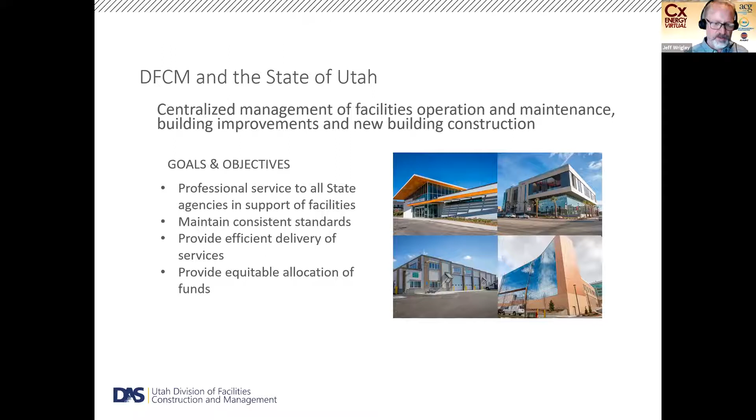We're centralized, and we believe this brings a lot of value to the state, mostly through the consistency of our standards and how they're applied. And then we also feel like we're pretty cost effective and efficient in how we deliver those services. So as I mentioned, there's two main groups within DFCM. There's the facilities management side and the construction management side. And then I'm part of the DFCM performance management group. And we kind of fit right in between and serve both sides.

And the goal of our program, as well as the goal of DFCM in general, is really to save taxpayer dollars. But we save taxpayer dollars through making buildings more efficient, making them perform at a high level, and there's other things too. Energy is important, but we also look at maintenance cost. We also focus on space utilization and employee productivity through well-being and comfort.

We work with facility managers to help improve existing buildings. We collect data. We try to analyze systems and find ways to improve them. We work with our capital improvement project managers through finding ways to optimize renovations and capital improvements. And anytime there's mechanical systems or electrical systems, we try to get involved, help bring in consultants and experts to make those better. And then we support our capital development project managers by the same thing, really. We bring in consultants and try to improve and make the most efficient buildings we can.

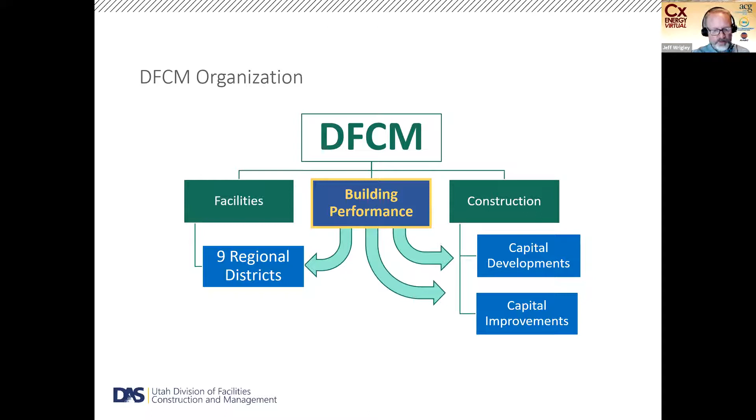We all work on projects of our own. We have many mechanical upgrades, lighting upgrades, different things we do that have an energy or performance focus we manage. But then we also all have focuses of our own. Kat focuses on space utilization. Sean focuses on data collection. And I focus on new construction and capital development. And a big part of our capital development work is our high performance building standard. And so this is really key to understanding our approach to envelope commissioning, which of course this is about today.

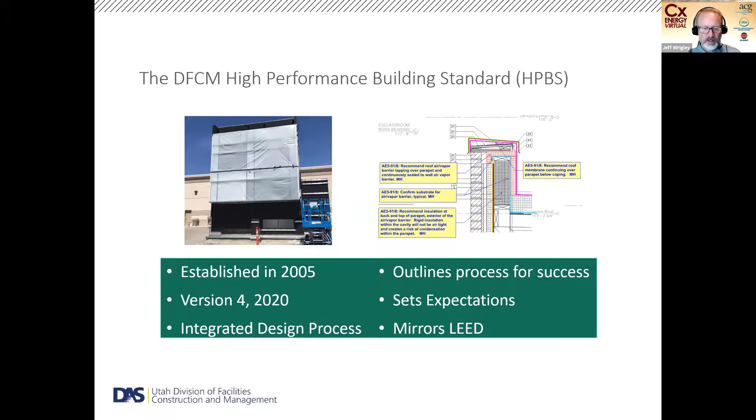The goal of the HPBS really is to spend money wisely during design and construction. We like to talk about sustainability. We all really want things to be as sustainable as possible. But when we talk to a lot of legislators and different people within the state and agencies, we find that cost is the driver. And so we focus on cost. We want to reduce the overall cost of ownership over the life cycle. And life cycle cost is an important key to the high performance building standard.

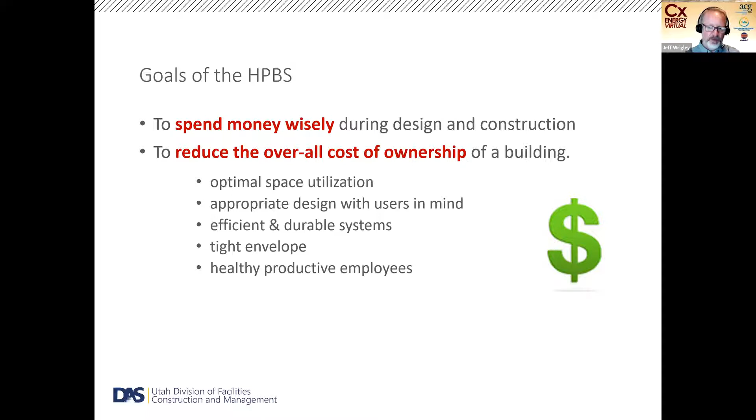But we aim for performance in a variety of ways. We're looking for optimal space utilization. We want durable systems, durable materials, things that will last. We really want a tight envelope. That's something that's evolved over time in importance, and we realize it. And in the end, we really want buildings that support healthy, productive employees. And all of these things help drive costs down for the state.

Some of the notable elements of the high performance process is we look for workshops at each stage of design. We try to bring everybody together. We want facilities management involvement. The people who are going to live in and operate the buildings are critical to the success of a project. And we have our consultants.

The high performance building standard outlines three primary consultants: the energy modeler, the systems commissioning agent, and the building envelope or building enclosure commissioning agent. We look for project long involvement from these consultants, and everybody is a resource to the project.

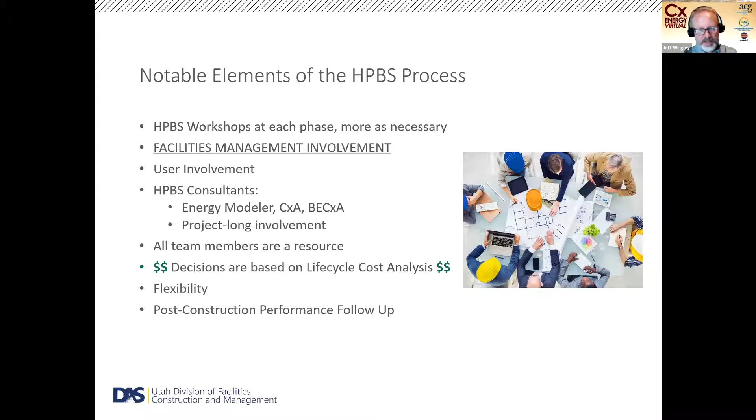The consultants are really the hub of that. We in the building performance program are not engineers. I think we're more project management and program management specialists, and we want to see this process go through very smoothly and with a high degree of success. That really comes down to those consultants we bring on board and relying on the expertise they bring. A lot of the program development we've seen over the years has come as a result of fantastic input from our consultant teams. We have great relationships with them and really value their input.

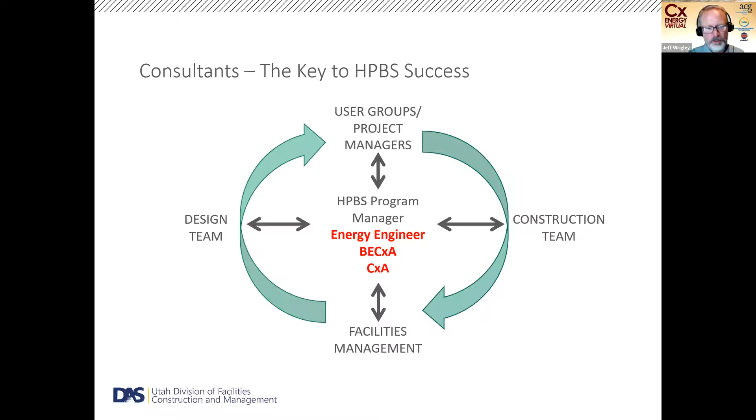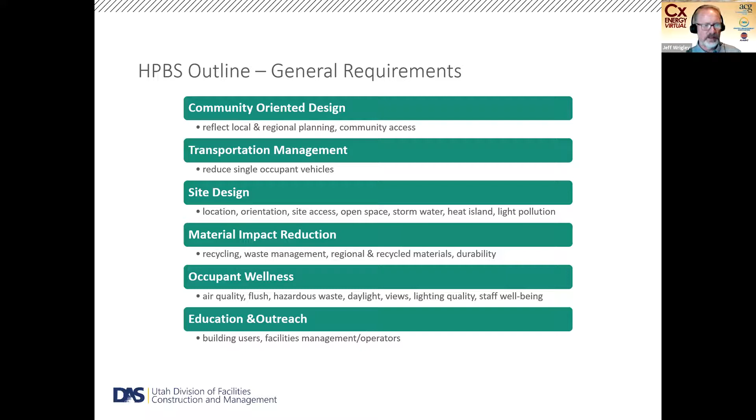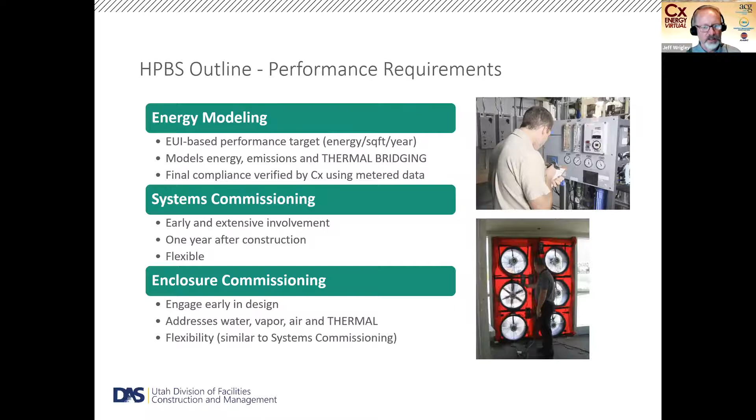So getting into this, I'll just quickly go through it to give context, but the various sections of the high performance building standard are again very LEED-like. We have specific sections addressing community-oriented design, transportation management, site design, material impact reduction, occupant wellness, and education and outreach. We have pretty detailed sections covering what we expect out of energy modeling, systems commissioning, and enclosure commissioning. We also address water use, metering, fault detection, and equipment purchasing.

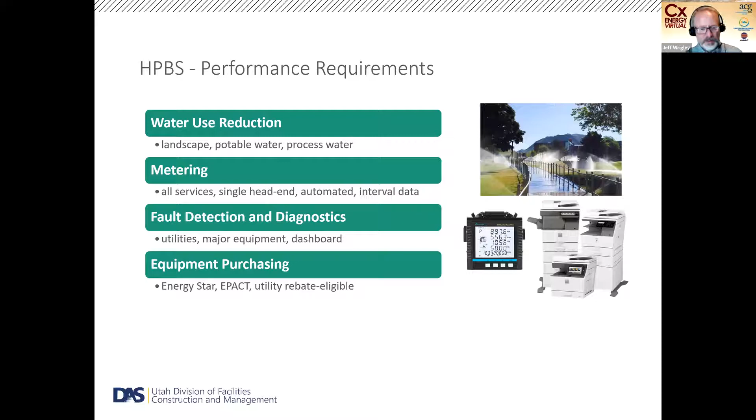So moving on, I'll talk a little bit about the development of the high performance building standard. It started back around 2005, ish. I was not at DFCM at the time, and I've talked to a lot of people, and this is the stuff that I've learned. But back originally, when we first got started, the standard was supported and backed by legislation and a desire to

promote those energy cost savings and efficient facilities. And obviously, or most likely, I would say this was all influenced by LEED and things that were going on in the design community at the time.

But looking back at the original high performance building standard, it was actually called the high performance building rating system. It really didn't say a whole lot. It was fairly brief. There was a lot of flexibility in it, probably too flexible, a lot of 'may' and 'might' and 'should' sort of language. And at that time, commissioning was included, but it was very limited in its role.

And so over time, we looked to update the standard, and a lot of pressures contributed to that. Really, there was a lot of interest within the state coming from the top. The governor at the time was very interested in energy efficiency and cost savings, and there was a lot of push for higher than code standards.

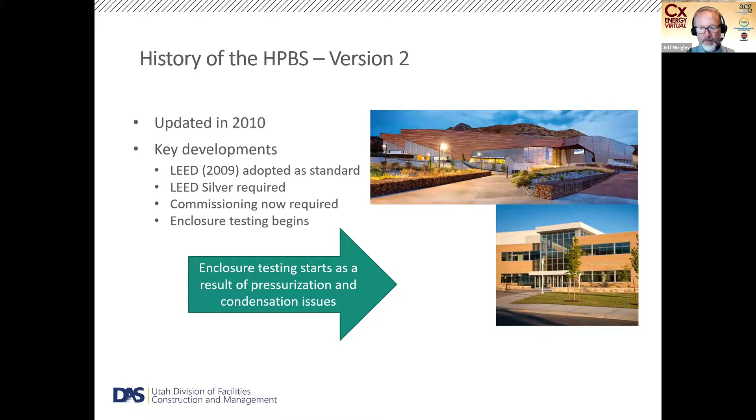So a lot of this led to the next update of the HPBS, which happened around 2010. As the consultants got involved and we started pursuing and looking at envelope in particular and commissioning, a lot of study went into it. There was a lot of interest even from our energy modelers. We had some really good eager energy modelers who were really willing to help look at the costs of improving envelopes and how all the costs came together. Our project managers were open to applying stricter air leakage standards.

The person who was in my role at the time explained it to me, basically saying for a couple of years they really played around with it a lot. They brought in a lot of different consultants. They really focused on learning as much as they could about, in particular, envelopes and what could be done. There was some pushback, but over those couple of years, they really dialed things in, and that led to the next version of the high performance building standard, which dropped LEED. We felt like LEED was evolved enough and understood enough, and we kept seeing a lot of the same things pop up. So LEED was dropped, and then enclosure commissioning became a big part of it, with a really strict performance goal of 0.1 CFM per square foot of surface area.

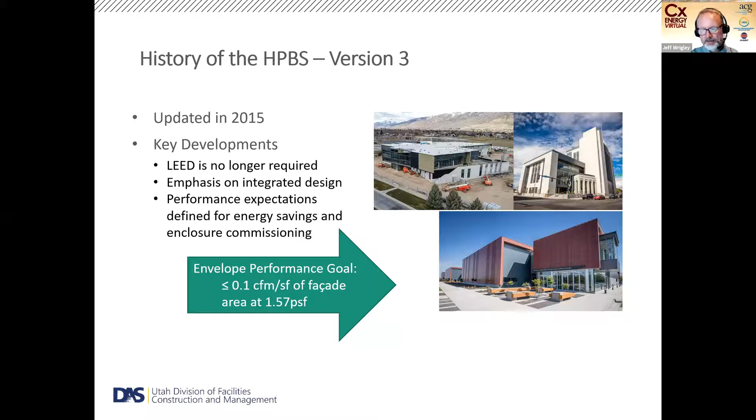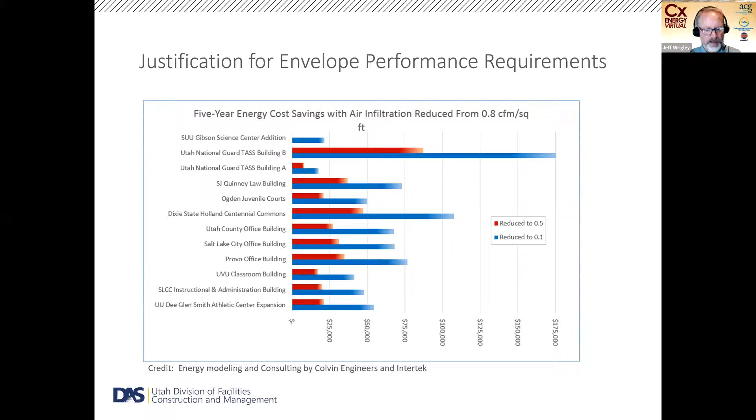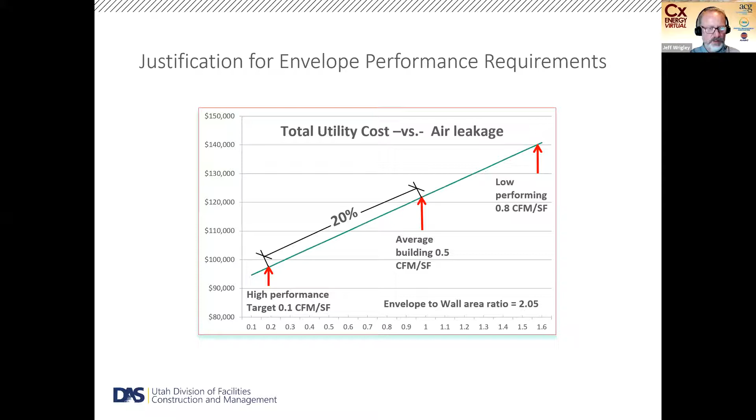And so now we've moved on to a recent update to the high performance building standard. It's in a lot of ways very similar to version 3, although better refined. The next move is looking at performance measurements. We want to look at more results and measure. Now that data is becoming more and more accessible, we want to see how the buildings perform in the years after construction is complete.

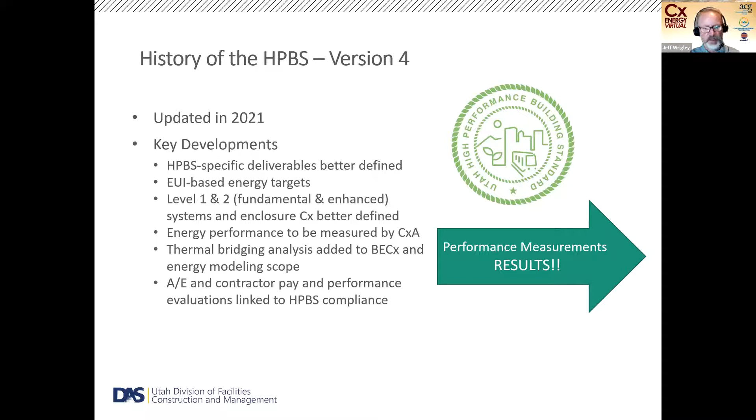So as I move towards the end of my part of the presentation, I'm going to dig a little more into building envelope commissioning and what our program is and the processes that we follow. Like I said, this is all developed over the years, but we really feel like we've found a really good spot.

Key to this, of course, is our consultants. Like I said before, we're not experts. We know a lot, but we're not experts in any of these areas, and so we look to our consultants to bring the expertise. They know the ASTM standards and all the different things that go into envelope commissioning. Although our high performance building standard does reference those things in some places, we really try to focus on what we are asking our consultants to do.

And we're focusing on integration. We want active involvement from our consultants to work with the architects and engineers and contractors, and also us and the agencies. We really look for excellent communication as our consultants work and our commissioning teams work with the contractors. It's really important that there's a good understanding of what's needed and how things can improve.

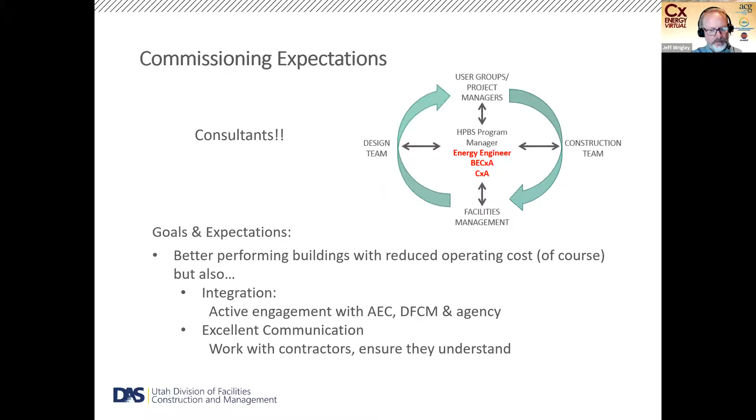And then the HPBS also outlines the process. I won't go through all of this, but it's outlined. We want different things at different stages of the game. We're looking for design reviews, we want submittal reviews—all of this stuff is laid out. However, we really want things to be flexible and adaptable. We want our commissioning teams to be able to react to the conditions of the project, to the needs of the teams, and fit their approaches to that.

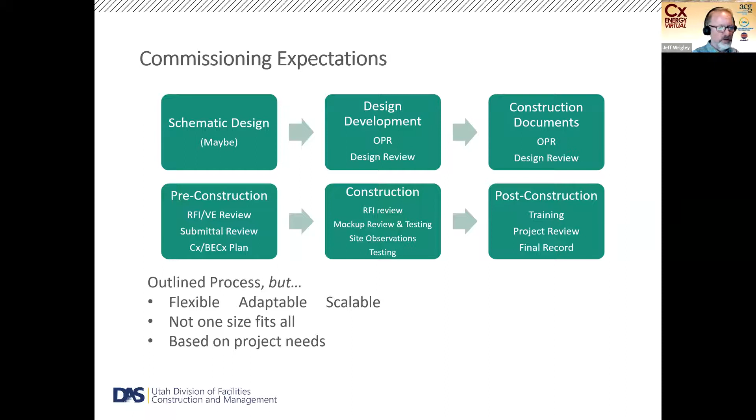We want consistency in how things are done, but we don't want a cookie cutter approach. We know that not one size fits all, and each project needs to be addressed based on its own needs. And a huge part of this is the owner's project requirements, or OPR.

This is something that is mentioned throughout the high performance building standard. It's something that the architect manages, but we demand input from our commissioning agents to help shape this, to help understand the owner's requirements, and to record these things in the OPR and make sure that those things are followed through all the phases of design, and that they're all updated throughout the project. And really, again, the value comes from understanding the building, understanding its purpose, and understanding the agency that it's going to serve and what their needs are.

And a big part of this is how our consultants are selected, a big part of the flexibility. We have two processes that are dictated by statute. One, we can direct award. Anything under $100,000, we can pick the consultants that fit best based on whatever factor. We get a proposal, and the fees are based on a schedule.

Basically, we have a fee policy that's outlined in our DFCM standards that gives a range based on the complexity, based on the size and budget of the project. If a project is large, then we have to do a value-based selection. But again, we're not looking at cost. We're not looking at the structure or the outline of what the consultant or the commissioning agent is proposing.

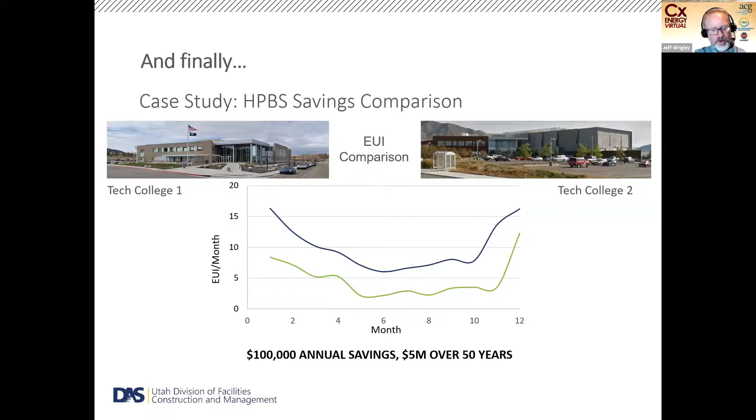And just real quickly, case study - we did this a few years ago and looked at two buildings that were in very similar climate zones. One built at an earlier stage of the high performance building standard, one built later, and we saw a noticeable improvement in the EUI and the performance of the buildings. So with all of that said, we'll now transition to Steve and his part of the presentation.

Thanks, Jeff. That's some really great stuff. One thing to know about is, we see from a lot of owners is that they just defer to, there's a lot of these programs and processes that are out there published. There's so many of them. It's very confusing, with so many industry guidelines, which one do you listen to?

So there's really great stuff in a lot of these, but a lot of these aren't a one fit all for project type or for a lot of owners as well. So when you got to look at this, it's sort of that program versus the process.

So DFCM, they had a need, right? And they were trying to address that need, and it took them a long time, which is great. You don't get to it - it's not a race. They're getting to something now that works for them perfectly. So this process, those commissioning processes and standards that are out there can help execute the program.

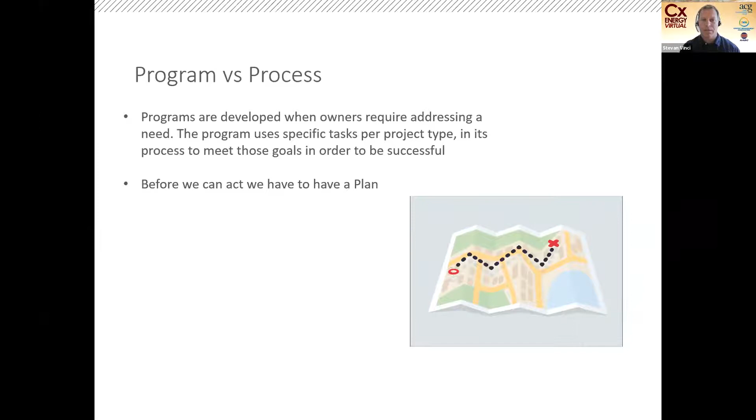But before we can act, we have to have a concrete plan. And that goes into the importance of what Jeff just said about the owner's project requirements.

They're often thought of as last minute. They're usually cut and pasted from previous projects. A lot of the times you can't really get that benefit from that. This has the potential to have a huge impact over the design and life cycle of a project for an owner.

So when an OPR is developed, basically it's their roadmap. You want to keep it as a living document. It's going to be great for all the project stakeholders, provides a document for the service life of your project. And it'll apply for any modifications. And I find a lot of the times having a really good, thorough owner's project requirement, you can capture a lot of the things that maybe you couldn't do in design documents or as-built documents.

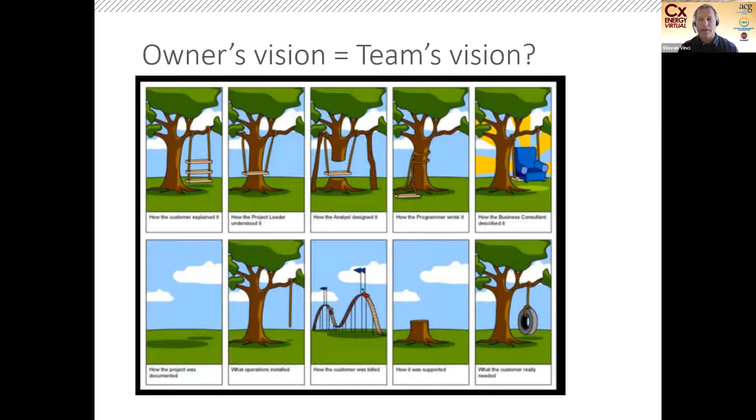One of the more important things to look at, though, is to make sure that the owner's vision is actually what the team's vision is. So that document can help us translate what the owner actually wants from a performance or even prescriptive requirements to the design team to allow them to have a clear path on what the owner wants when they're coming into design.

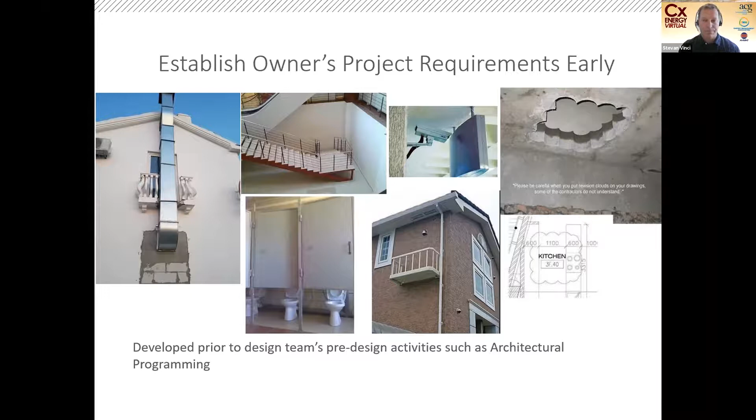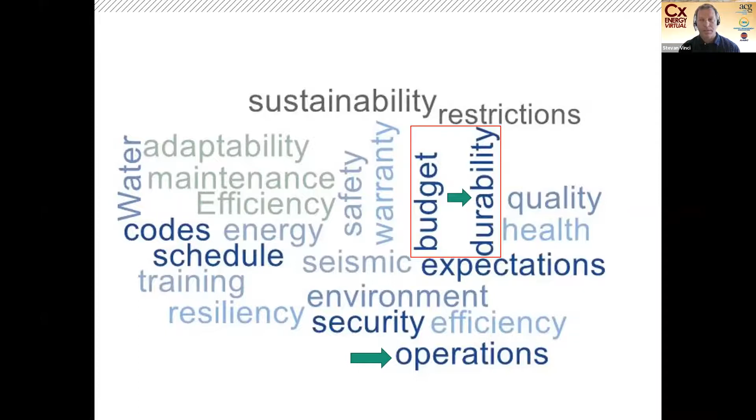As well, one of the things that I liked about the DFCM is that they actually use their OPR to direct sort of what they're doing into post-occupancy, into the operations phase. So rarely do you ever see that.

And so you look at what's important to the owner, and how to ask the right questions and have the right people in that room to make the right decisions. You can start these out with having some high-level needs of the owner, looking at the occupants, the facility managers, everything, and don't be afraid to include any restrictions or limitations.

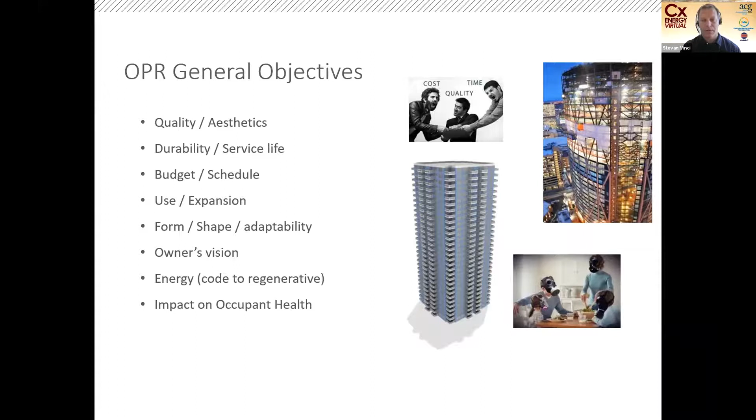And a lot of these things should not be confused with architectural programming, which a lot of projects use as sort of their OPR. That architectural programming is when architecture begins, but if you could establish the owner's commissioning or performance program much earlier than that, then you'll have a clear set goal getting into design.

And then you can drill down into specific objectives. Once you lay your high level things, you can drill down to a lot of these things. One of the things to ask them about is their maintenance requirements. Are you putting something on the building that the facilities guys are expecting to just do their preventative maintenance off a ladder, or do they need to have swing stages or lifts involved and things like that? So it's looking at the maintenance expectations for the life cycle of that building.

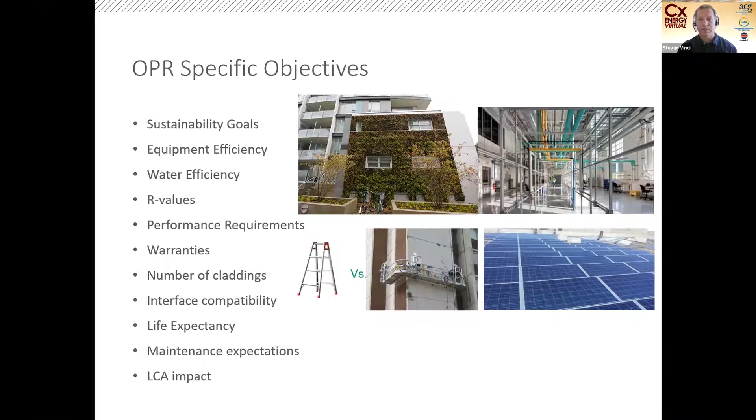One thing I wanted to touch on too is that we have a lot of owners who think, we'll just let LEED handle it, right? So they just require meeting LEED. And one of the things is there's a bit of disconnect between LEED and what could be in an owner's project requirements. LEED only requires certain systems to be commissioned, where in your owner's project requirements you may have more systems, more aspects of the building that the owner wants somebody to commission or look at.

So there's that disconnect. And there's even a bigger disconnect when you get into the prerequisite with LEED, because from a building enclosure perspective, all they want is that there's enclosure in the OPR, a basis of design review, and one design review. And that's it. That meets the LEED prerequisite requirements for building enclosure commissioning.

However, what happens if the OPR actually requires more testing, more performance, things like that? Who's going to do that past that, for the rest of the design, into the bidding phase, construction, and all that? So that's one thing to look at - don't just think a document out there is going to cover all your bases for you.

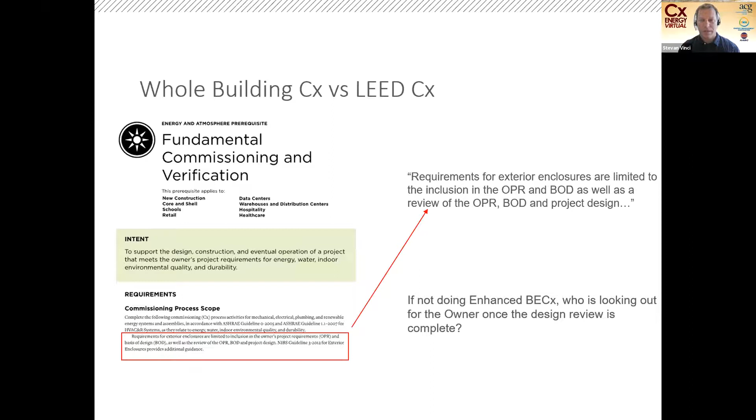And one thing I always try to tell project teams to consider is that during those VE phases, during construction, and the submittal phase, is to keep the OPR in mind. You're not just going to approve something just because it comes in a little cheaper. Are you doing that at the effect of something else from a performance perspective? Sometimes there's no change and no effect, but it's just something to keep in mind, that that OPR should be with you in your mind through all these different phases in the process.

With that, I'll turn it over to Rick. Great, thanks Jeff and Steve.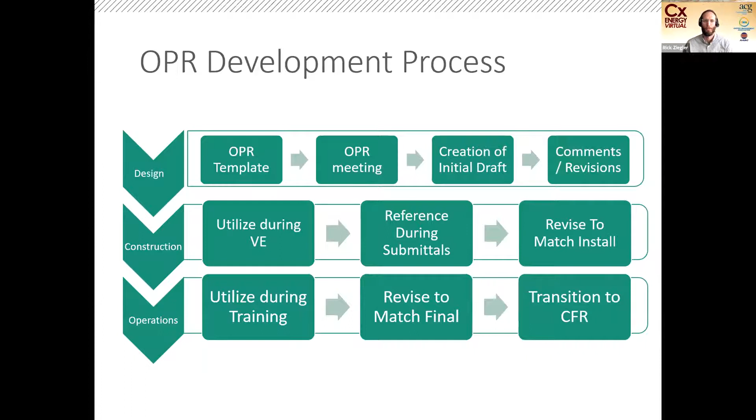Okay, so in our last 15 minutes or so, we'll close out with some technical specifics within the state of Utah's program, and also some key technical points that may be helpful for envelope commissioning practitioners, but also for owners looking to gain maximum value from an envelope commissioning process.

I think one thing the high performance building standard does well is categorize building types into two types that require different levels of commissioning: fundamental, which is a more basic program, and enhanced, which is more complex with more stringent performance requirements. Based on the state of Utah's architectural project complexity and budget, they've set a line where buildings require the enhanced, more robust program. Anything less than that can use a more basic or fundamental approach.

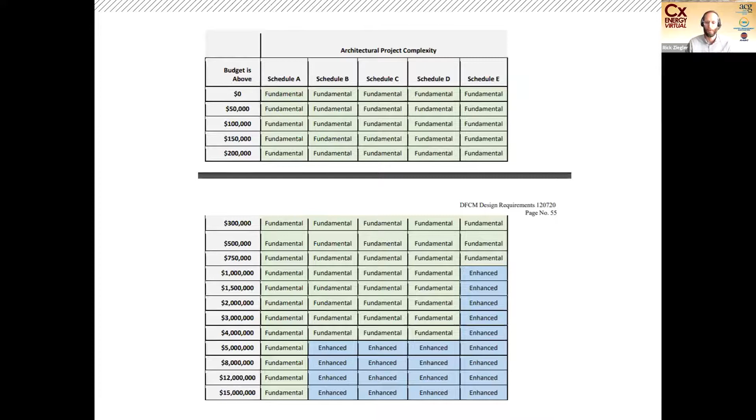Within the guideline itself, I'll point out a couple things. I know this is a lot of words, but I've highlighted a couple keys that I think contribute significantly to the state getting maximum value out of this program. One is that the building enclosure performance criteria must be reconciled with the project specific energy model. This is trying to create reconciliation and coordination between the energy model and the building enclosure performance, specifically things like air tightness and thermal performance.

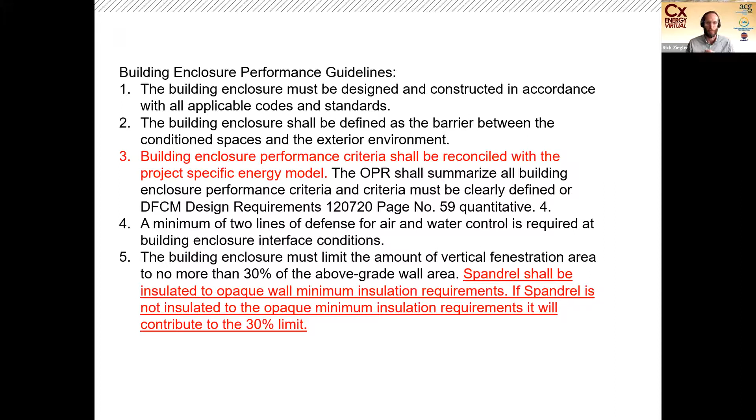The other interesting thing the high performance building program requires is that spandrels must be insulated to the opaque wall minimum insulation requirements. If not, it has to contribute to the state's 30% glazing ratio. What we've seen is some people skirting around the requirement that spandrels need high performing thermal performance, but realistically not getting even close to the opaque wall minimum in terms of thermal performance because of thermal bridging that's not accounted for.

In terms of air leakage, the enhanced buildings require a very tight building envelope, an air leakage rate of less than 0.1 CFM per square foot per ASTM E779.

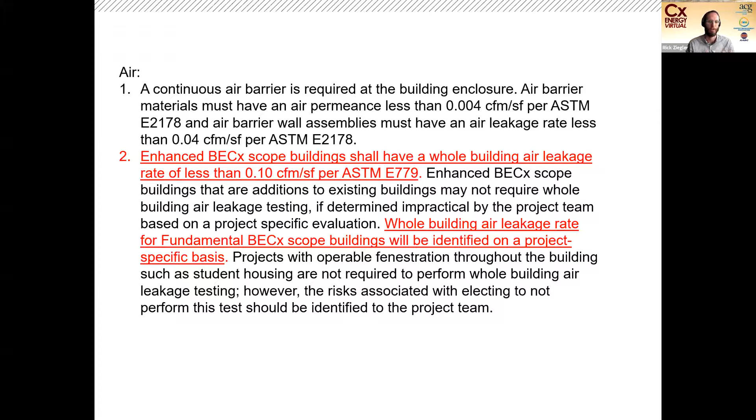The program also allows buildings that fall within the fundamental category to identify a project specific air tightness based on project specific energy goals. That gives a lot of flexibility in smaller buildings to take a project specific analysis. So it's creating structure where we've confirmed structure is needed and we know the goal, while also allowing flexibility in other types of building projects that may not benefit from or achieve maximum value from such a tight building envelope as the larger buildings.

I think recently there's been great progress on thermal performance requirements. The effective thermal performance must be reconciled with the energy model and the mechanical engineer. What we found is that thermal performance on buildings is significantly overestimated. A typical building where we think we have a wall assembly with an effective R15, I think realistically is around an R5 to R7, just based on projects I've worked on recently, when you start accounting for thermal bridging. And a lot of that thermal bridging is historically neglected.

I'll get to this a bit later, but when we realistically look at thermal performance and show that on the energy model, it allows us to make improvements to the envelope that actually increase energy performance. The state of Utah's thermal performance requirement says that if an assembly's thermal bridge does not contribute to heat loss of more than 10%, it can be ignored. This is a way to avoid making thermal bridging requirements overly burdensome for projects where people are just now starting to look at the impact of thermal bridging.

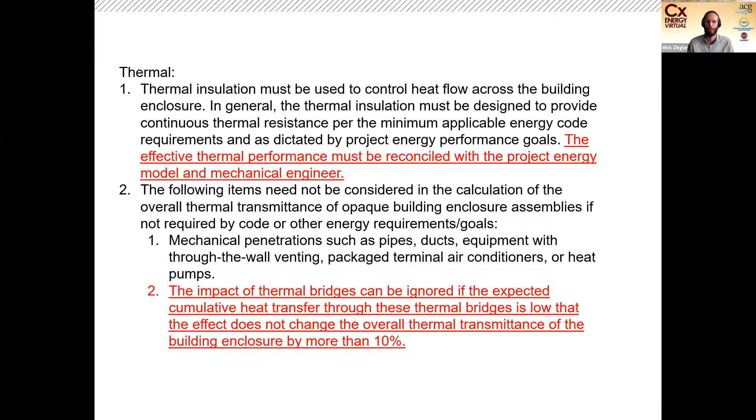Moving into water, air, vapor control, most state of Utah projects use a backup wall, exterior insulation, and rain screen cladding, which has given them a lot of good high performing buildings with good durability over the last couple years.

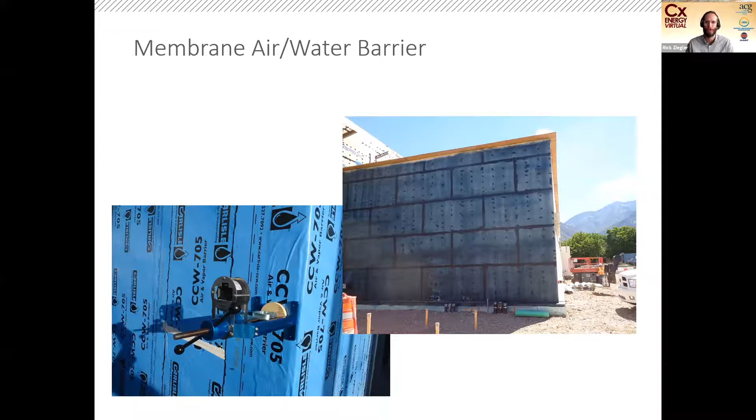As you can see, there are a lot of things we need to be looking at with the membranes. The fluid applied membrane in the photo on the right is obviously too thin. So this is something we look at during the construction phase, making sure the installation is performed per the manufacturer's requirements.

Horizontal conditions, there's actually a lot of good discussions on vapor permeability of horizontal air water barriers, especially coming out of the Pacific Northwest right now. And so we want to look at these in terms of permeability and also waterproofing, right? And I think there's just some good research out there that is looking at these things, especially rough openings where you return the air water barrier into a rough opening below a window system.

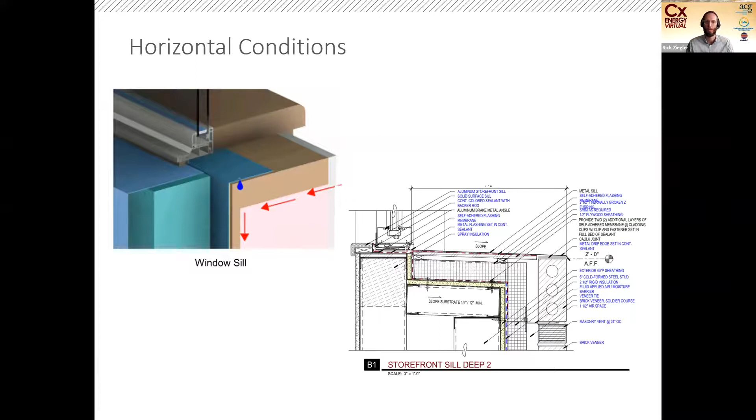And traditionally, we're thinking that some of these small areas would benefit from an impermeable membrane, but there is some research out there showing the benefits of allowing that to dry to the exterior, and suggesting that a permeable membrane may be advantageous in some of these types of conditions. So I think that is really helpful. There's a lot of good research in the building enclosure industry right now that we really are trying to apply to a lot of our projects that we're working on.

Real quick on roofs. So one thing I think that's really important is that all VE options that are brought to the table need to be evaluated by the building enclosure commissioning agent on these projects. And the intent of this is not so that we can come in and say, hey, no, we don't want to do this. It's really so that we can provide realistic advantages and disadvantages of the VE option to the owner so that they can make informed decisions, right?

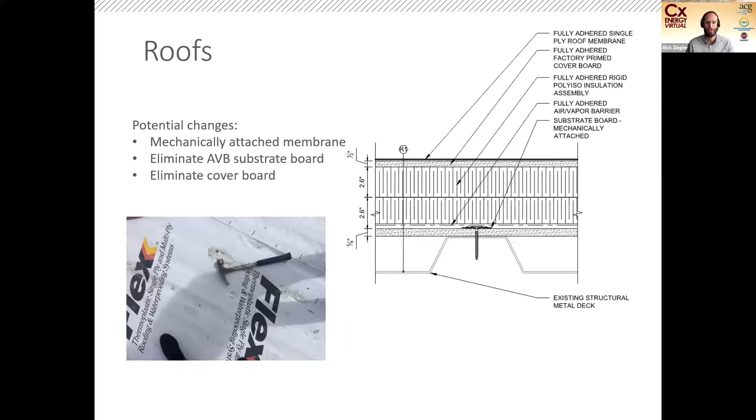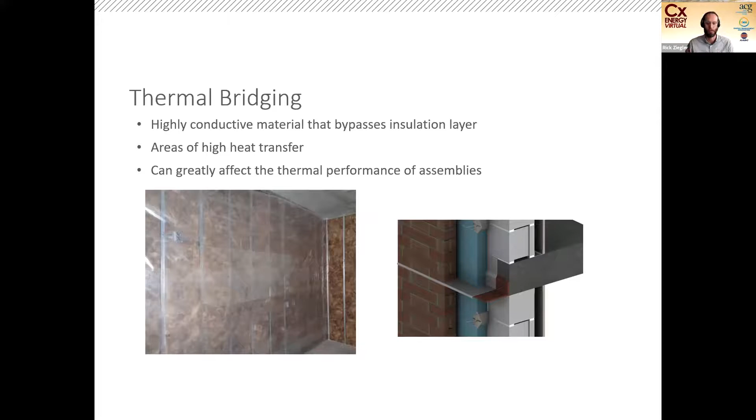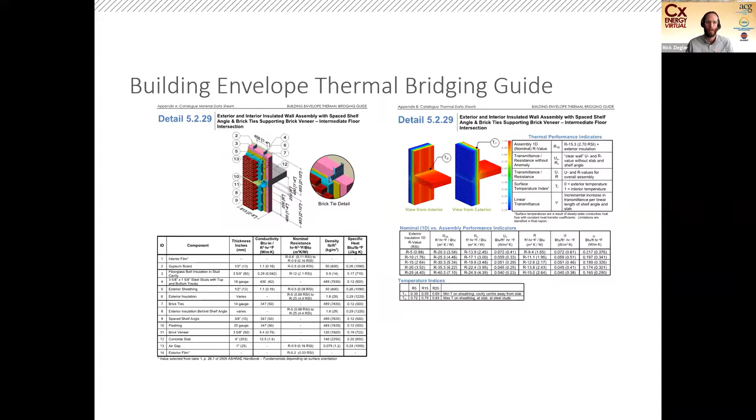We worked on creating a building envelope thermal bridging guide over the last couple of years with some partners shown on the slide. And basically, we've provided this guide that gives project teams really easy ways to quantitatively identify effective thermal performance that accounts for thermal bridging. And so what we have here is a realistic building envelope analysis where we're looking at all types of conditions within the clear field of a wall or within linear interface conditions like parapets or shelf angles or glazing perimeters. And now we can take this guide and very quickly and accurately identify what the effective thermal performance is.

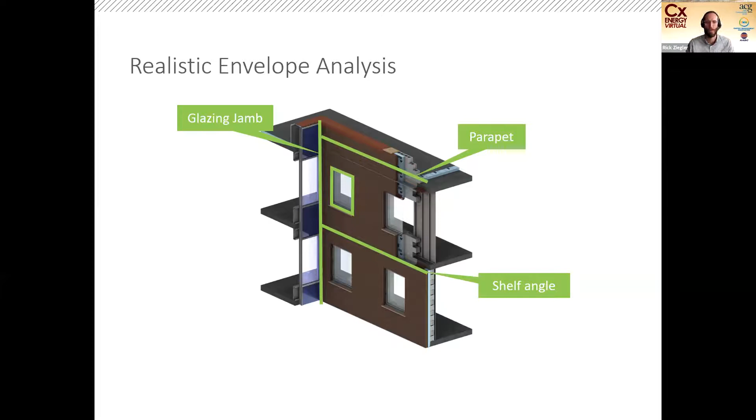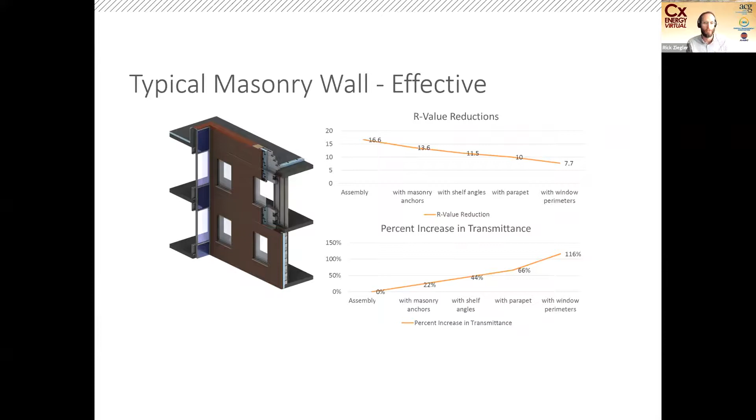And so when we look at a typical masonry wall, for example, we may have an assembly that has a nominal R16.6 thermal performance, but we start reducing the effectiveness of the insulation once we add in masonry anchors, shelf angles, parapet conditions, window perimeters. And so now, due to the thermal bridging, we're actually at an R7.7. We think it's really important that project teams use the actual thermal performance rather than the nominal or even minimal reduction in effectiveness that accounts for some thermal bridging, because it doesn't quite get you to where you need to be.

And so the reason I think that this is so important is because we worked on so many projects where we have an energy modeler who says, hey, we have R15 walls, we're good. There's really no value in adding any insulation or addressing thermal bridges on the project. Let's look elsewhere for how we can improve our energy performance. And so I think that we're missing out on a huge part of realistically adding value to wall assemblies because of the overestimation of that thermal performance.

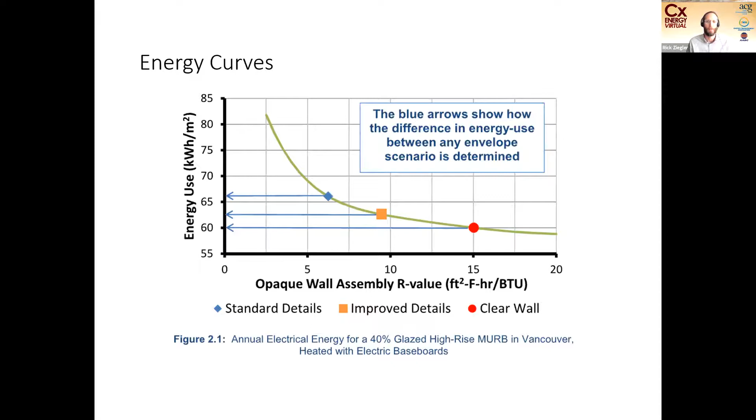And so when we realistically look at it, we're probably more at an R6 effective, right? And so once we start improving from R6 maybe to R10 or R15, then we actually have some pretty good improvements. But yeah, we would agree that if we're going from R15 to R20, maybe the value isn't there. But I just don't think that we're there on most of our projects.

And here's another scenario where we kind of look at payback of different options, right? And so we have the baseline wall assembly. You can see much more energy use than the code requirement for this example of a maximum U factor of 0.064. And we start looking at the payback of different options.

But once we start looking at multiple options combined, and improving various components, looking at one particular instance, we actually get down to areas that have expensive quote unquote technologies into the 18-year payback range, which may be something that is more palatable for project teams rather than comparing to, hey, just adding more insulation, which is a 54-year payback. Yeah, we would agree. Probably not helpful for a lot of projects.

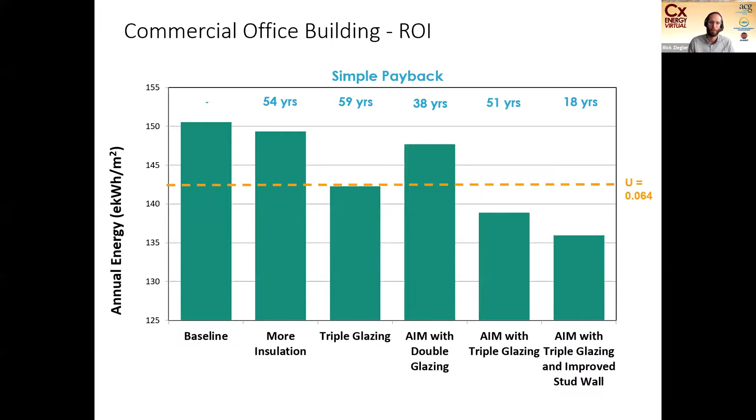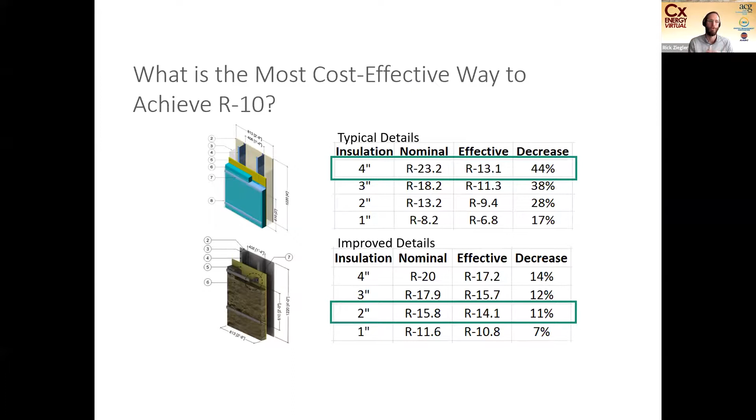Just another comparison here between a metal panel wall example, right? So can we use 4 inches of insulation and get an effective R13.1 with continuous metal girts, or can we use a thermally broken clip system and use 2 inches of exterior insulation? And so these are the things that the state is really looking at carefully to very thoughtfully use a cost-effective approach to building up the wall assemblies.

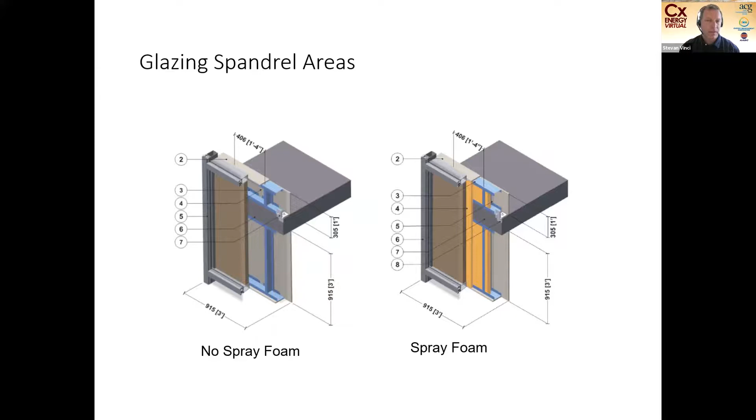Steve, did you want to chat about this one? Yeah, this is just another one to reiterate. This was a project in Portland, Oregon, where we had the spandrel area, so the non-glazed areas of the curtain wall had insulation in front of the metal back pan. And so the design team thought, hey, we can create a really great additional energy efficient building with all this space that's behind the back pan in that little metal stud cavity, between the back pan and the drywall.

So in looking at that, there is enough space to add about an R11 worth of insulation with spray foam. But when you take into account a lot of the metal angles, the linear transmittance and point transmittance of thermal bridging, simply adding in spray foam, you can see here from the graph, adding an R11 actually only got you an R4's worth of increased performance. So that's something to consider as you're looking at projects. More is not better in all cases.

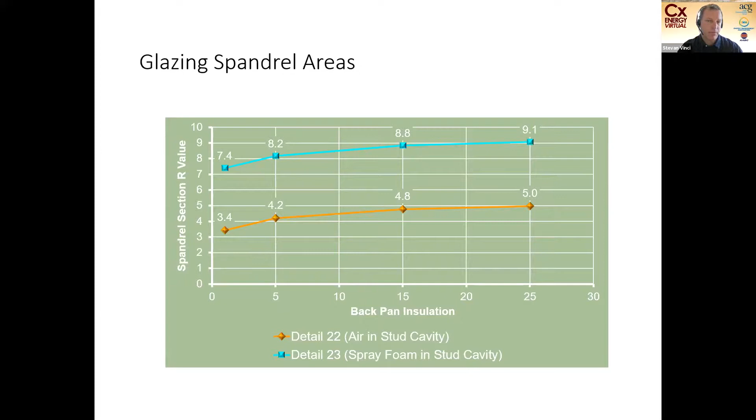So, is it better to spend all this money on something expensive like spray foam, or should we look at using that money to come up with some other cost-effective ways to increase the energy performance? That's great. Thank you.

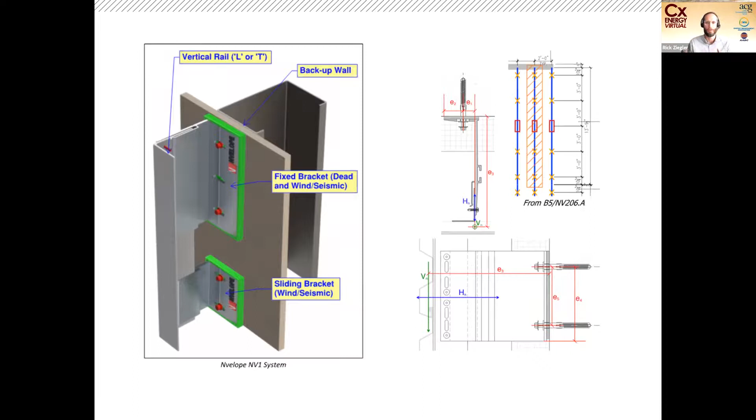Secondary structure. So engineering of claddings, components, and roof assemblies is something the state has also looked at including into the envelope commissioning program. And so I just don't want us to think that this needs to be limited to air, water, vapor, thermal. It really can include any level of other types of components that the owner wants to verify the performance of.

And so you can see, hey, we're commenting on deflection limits and things like that of a curtain wall system because there were some previous problems with curtain wall systems in the engineering aspect. So yeah, lots of good things I think coming from that direction.

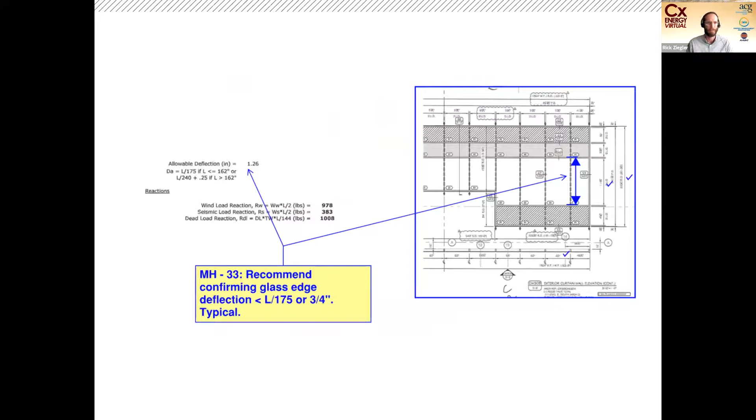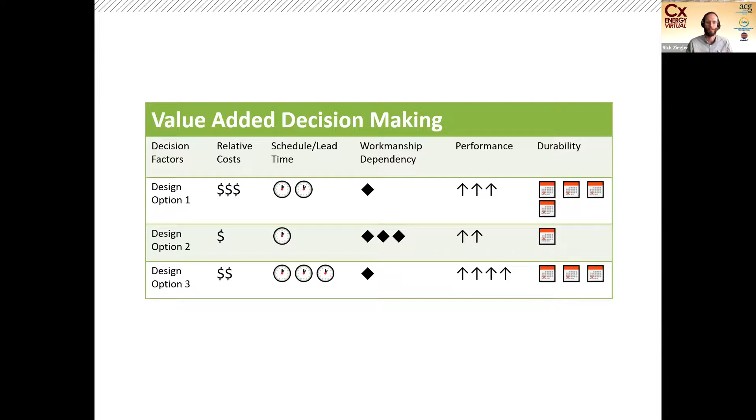Let's look at design reviews a little bit. I think that this is really important for us to understand in terms of adding maximum value, right? So value added decision is something that the state's looking at doing on a lot of these projects. And so it's like, let's look at all the options, look at the pros and cons, look at the schedule, workmanship dependency, performance, durability, cost, all these different things. And let's together collectively decide what works best for the project. And the great thing is we're making a lot of these decisions very early on in the design phase.

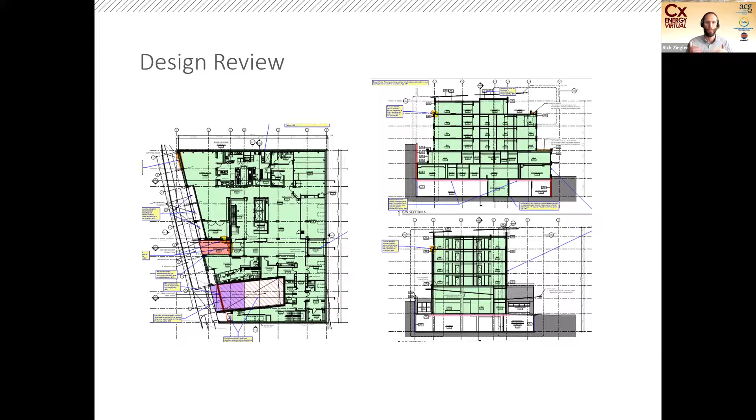Moving along here, I think understanding the plane of the building thermal envelope as well as other interior non-conditioned spaces is really important. And so a lot of times we'll, in a very detailed way, go through the plans, building sections, and make sure that we understand what each environmental separator is really responsible for doing. And then when we're getting into the details, we're really looking at what are these primary control layers that we care about, and how are we demonstrating continuity of these control layers?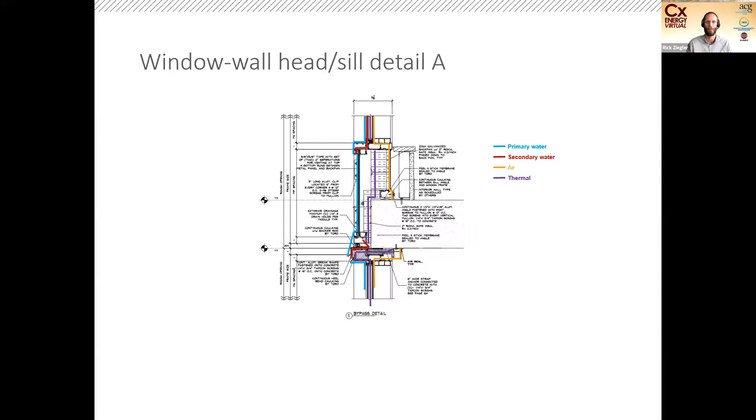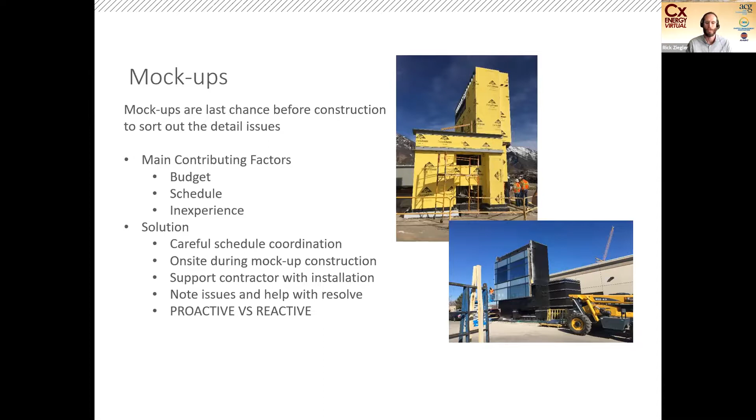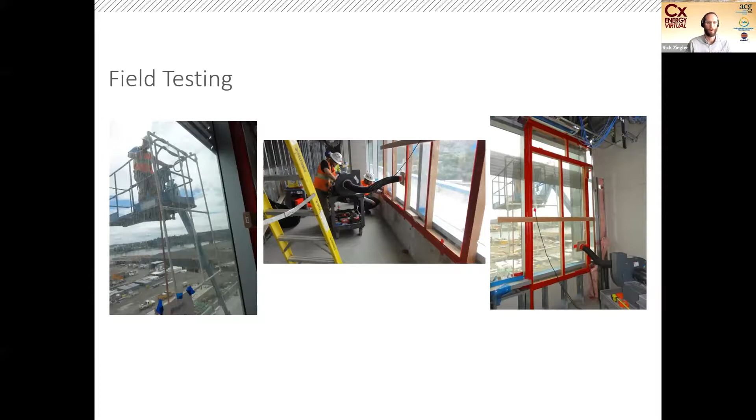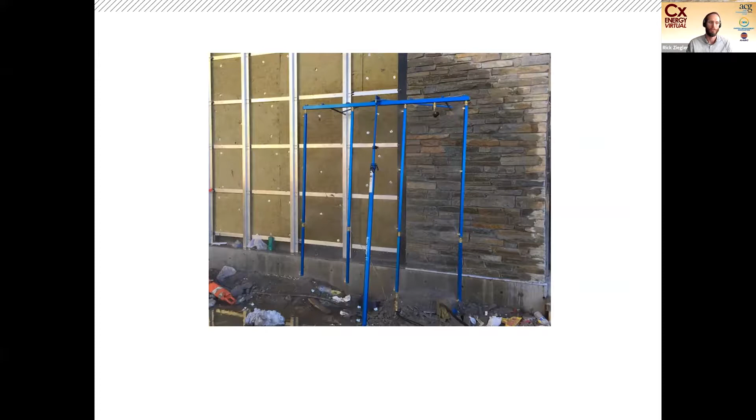And then field verification is critical. The state usually uses an on-site standalone mock-up for their projects that's reviewed, tested, and approved prior to construction on the building. A lot of the field testing is pretty standard field testing in my experience, a lot of water spray rack testing or air leakage testing. And I think we get creative too with not necessarily needing a full-on chamber test at a lot of areas. This was just a challenging expansion joint transition down the wall onto a through-wall flashing that we just wanted to spray with water. And so something like that, I think, adds a lot of value to a project without adding much cost.

And then field observations, right? We're not only looking at the materials and how they're installed, but we're looking at the complicated transitions. And so these are inevitable in every project. You have some odd transition that maybe isn't included in the design documents that we need to look at and make sure we are addressing appropriately in the field.

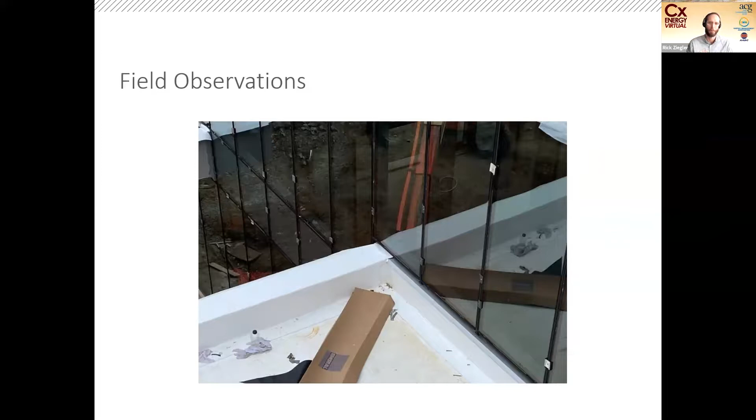And so just to close it out, I know we do have some questions that I want to make sure we get to. We just want to help the industry by sharing our experiences in the hope that envelope commissioning agent providers can continue to work with project teams and educate owners, educate the industry on how do we get the most value out of this program, right? And so we want to tailor that to each project to make sure the building gets what it needs. And then the building envelope commissioning providers really need to work with the client to make sure that there's some thoughtfulness that goes into the building envelope commissioning scope.

And then I think there's always an opportunity for increased coordination, especially from the building enclosure side, because in my experience, historically, sometimes we're kind of left out of the discussions with the HVAC engineer or the energy modeler. And I think that there is a lot of value when these groups can come together and reconcile performance goals and realistically look at what the building envelope is doing.

And then I think it's good for us to understand what tools are available in the industry, because I think tools are allowing us to quantify building performance early on in design, whereas previous years, I think we were going a lot on just experiential data, and what worked and what hasn't. I think we have some good modeling tools that can help us with a lot of these goal defining phases as part of the project.